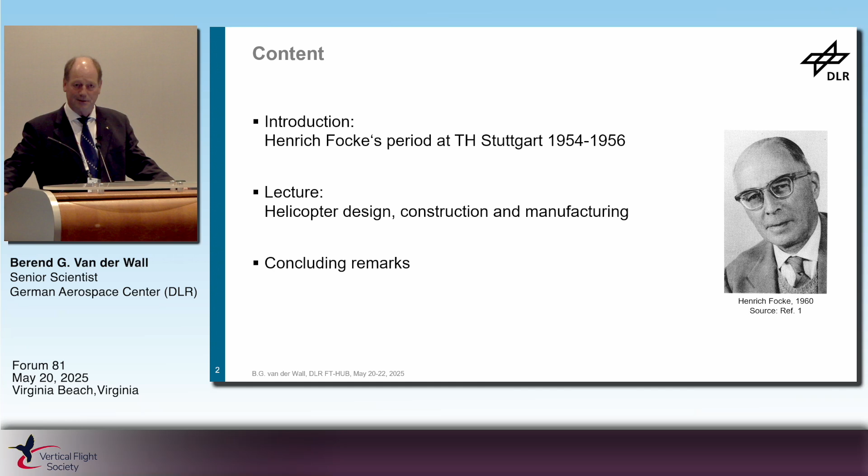On the right, you see Henrich Focke, a little later than the period of his lecture, 5 years later, but it's quite sure he looked about the same at the time. Looks like a grandfather to students, my impression.

In the 50s, in the post-war times, when no aeronautical research and development was allowed in Germany, he had a job first in the Netherlands and then went over to Brazil, who bought all the developments already made in the Netherlands. The subject was to develop the quad-tilt rotor Heliconair, but due to spare part issues, he was also asked to develop a 2-seater small helicopter called Beija-Flor, which means colibri or hummingbird in Brazil.

Until in April '54, he got a call from Germany, from the Technical University in Stuttgart, because just 1 year ago the restrictions had been relieved and the development and manufacturing of aeronautical aircraft would be allowed again in Germany. So every country reestablished their research facilities and universities, increasing the number of aeronautical institutes teaching aerodynamics and design, etc.

So the University of Stuttgart was looking for Henrich Focke to fill the position as professor and director of the new Institute of Aircraft Design, both for fixed wing and helicopters. As good complementary research at the Stuttgart airport, Professor Just, who was the chief aerodynamicist of Focke during the war times, was the head of the German Society of Helicopter Research. He was also lecturing at the university on theory, and Focke as a practitioner brought the industrial background to it. So they thought it beneficial for both the university and the development in Brazil.

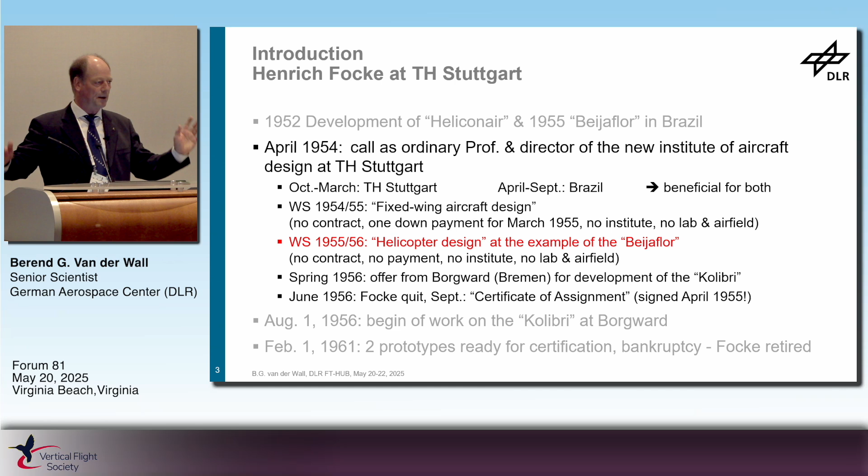Nothing was going forward. At that time, he was approached by Borgward, a car manufacturer in Bremen, who wanted to build not a Volkswagen, but rather a Volks helicopter. He was a single man heading the company and made all decisions on his own, with no one interfering. So Focke happily agreed, joined the Borgward company, and developed a helicopter. But at the time of certification flights, the company went bankrupt, and with it the helicopter development, so he retired.

Just as a short background, now we are turning to Focke's lecture at the Technical University of Stuttgart with all the content outlined here. I will come on to the content step by step.

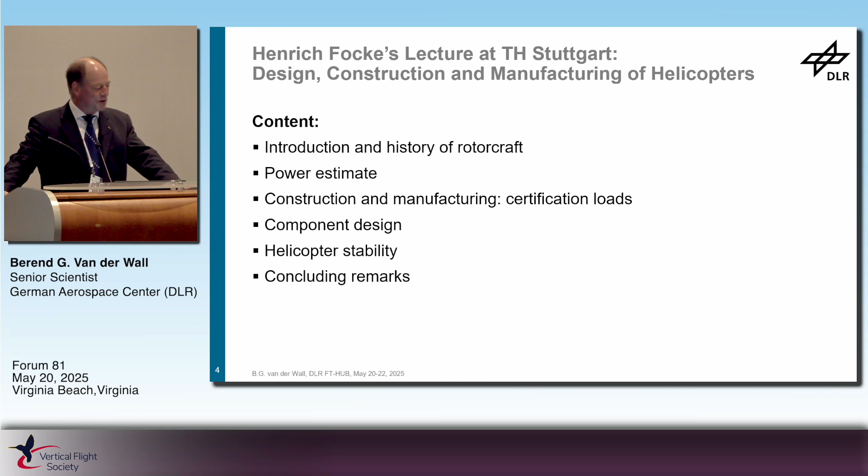Of course, I can only give a brief overview of what he's addressing in much more detail in the manuscript, which is a full prose manuscript of 122 pages, including graphs and sketches. Especially the handwritten sketches I want to bring here as well.

This was to give a student some impression about a helicopter, and hardly anyone had seen a helicopter in Germany at the time, maybe from Americans, but only the S-51 helicopter or so of that type. So most of the students had never seen one and did not really know what it is about.

He said the principle is: if you have two aircraft tied together by a 1 kilometer long rope, and both take off at start, they will turn in circles. You might fix the rope in the middle to the ground, and when the aircraft have some excess lift, they have centrifugal forces because they are turning around in circles, and the excess lift will bring them up higher.

And the result of the rope is the coning of the helicopter blades. So this is kind of equivalent to better understand the principle, the balance between lift and centrifugal forces.

Then he went over to the history of rotorcraft with the pros and cons of the early designs up to '22. He was thinking of these as kind of pioneers with no real success. The period from '22 to '34 had pioneers with at least some little flights, but significant handling quality and control issues.

Until in '35, with the German helicopter developments, there were the first practical helicopters that could stay in the air for a long time. They could reach high speeds, could reach high heights, and they had excellent handling qualities and stability. So these are the first practical helicopters in his mind.

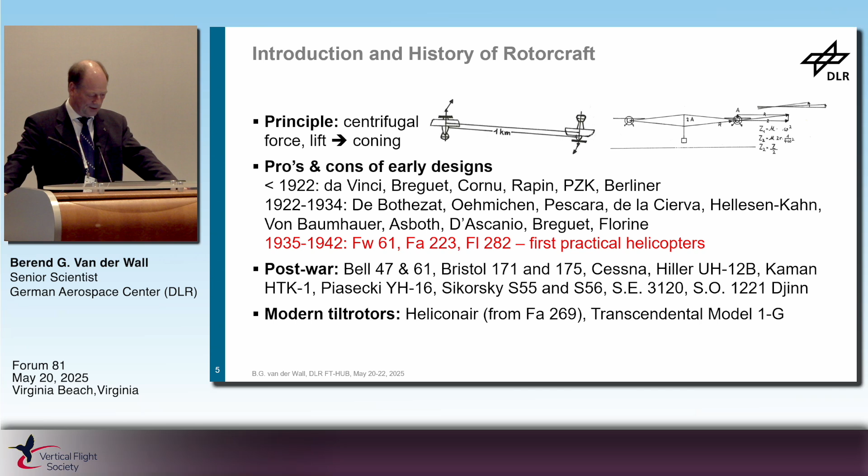The post-war period then brought all the international developments, especially in the United States. He also addressed the modern tilt rotors at the time, which was the Heliconair, a derivative of his own project, the FA-269 from 1943, and the current Transcendental Model 1G from '55.

Next, he stepped onto the helicopter design, starting with the main rotor, as usually everyone does. But we need to keep in mind that in '55 there were no computers at all. They had paper, pencil, and chart methods to design something. There was no statistics available about existing helicopters because only very few helicopters existed at the time.

So nowadays it's a completely different procedure to have a pre-design and detailed design. He mainly built on his own experiences. He always said theory like momentum theory and blade element theory is good and fine, but there are so many simplifications that you better rely on existing measured data, which he had from his former developments.

Any theory must be triple-checked with wind tunnel or flight test measurements before being applied, such that you know where it is valid and where it is not.

Then he turned to momentum theory, a theoretical result showing that even infinite mass could be lifted with rather little power if the radius of the rotor goes to infinity, but of course there are practical limits like material strength and mass increasing proportional to the third power of radius. He also addressed compressibility issues if tip speed gets too large.

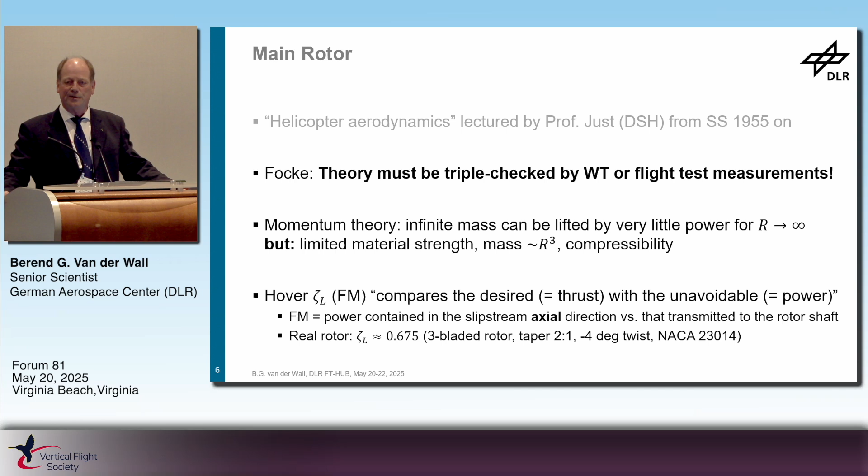His example helicopter throughout the lecture was the Beijaflor from Brazil, a two-seat helicopter shown on the left, with a maximum takeoff weight of 900 kilograms, rotor radius 4.5 meters. Disc loading is also given, and the engine power as a maximum continuous power as well.

The German development after the lecture, a couple of years later, was the Focke Kolibri, and you see there's quite an amount of similarities, but the cockpit is in the front now and the engine in the middle, instead of vice versa for the Beijaflor. And the overall weight is higher, of course, as is the maximum continuous power.

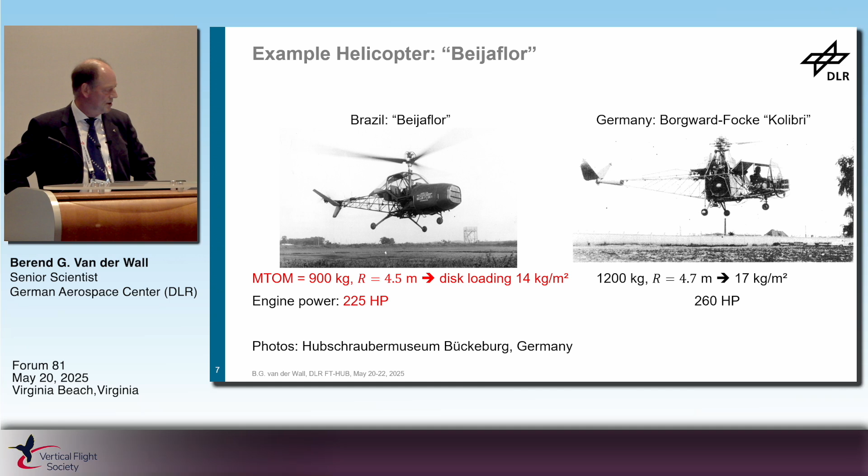So keeping the red numbers a little bit in mind, I repeat them here. He turns then to get an impression of how many horsepower will be needed in hover at sea level.

He ended up with 134 horsepower at the rotor shaft for hovering at sea level. However, that's not all - we have a number of losses: cooling, gearbox losses, hydraulics, avionics, auxiliary devices, and the big part of losses, the tail rotors and their gears.

Also, we have to fulfill performance requirements, which are minimum hovering height of 1500 meters out of ground and vertical climb speed of minimum 1 or 2 meters per second. So he said we need to make an estimate of the maximum power we need across the entire flight envelope.

This must be estimated initially, and we take 225 horsepower of the Beijaflor, because he already had the development in the back of his mind.

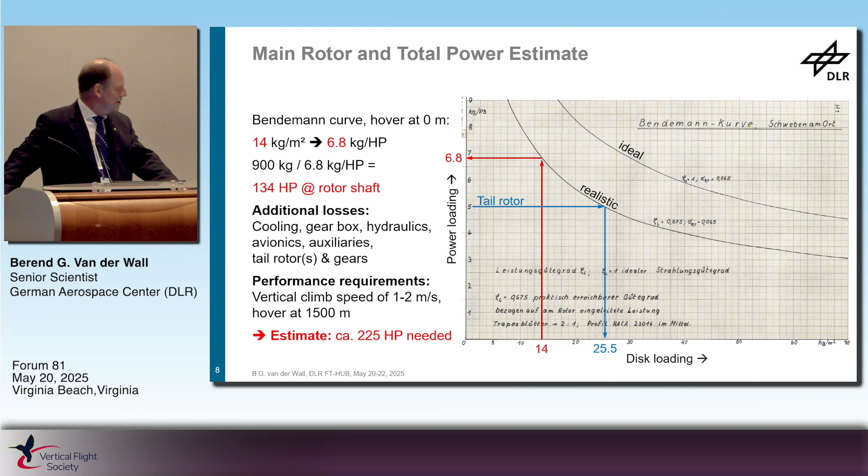He especially stated to his students that we would not be good engineers if we do not account for the extent of the consequences of all our simplifications in theory and the neglect of these. It's a very important sentence that cannot be repeated often enough, even for today's students.

He also said that today's engines usually have a fan for cooling already integrated, and we need not design it ourselves, which is fortunate.

The gearbox losses were addressed next. At the time, they usually had combustion engines with relatively low RPM, but the main rotor, of course, much less - about 1/10 of the engine RPM. Therefore we need most likely a two-stage gearbox, and every stage requires about 2% of the power. In this case, he judged the engine gearbox losses at 10 horsepower.

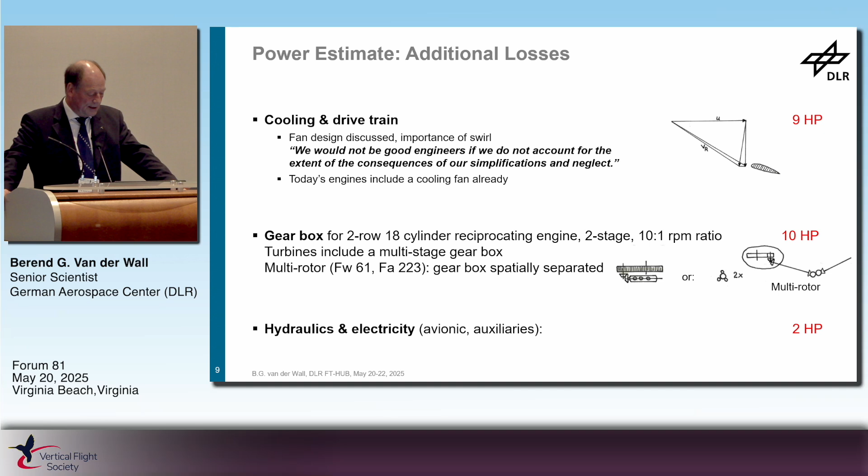Hydraulics and electricity for the avionics and other instrumentation would require about 2 horsepower. Then coming to the tail rotors, first with the conceptual design of them.

Address the single tail rotor like the Sikorsky designs. That's quite nice - they provide the anti-torque, they provide additional side force for yaw control of the helicopter, but they provide damping only in yaw motion because the tip-path plane of the tail rotor is vertical and doesn't provide anything for the pitching motion of the helicopter in terms of damping.

That's why he had already invented and patented in 1938 the twin tail rotor design, as sketched here in the graphs, with both tail rotors tilted by 45 degrees to the side, right and left. They provide both damping in yaw and pitching motion of the helicopter, which removes the need for horizontal or vertical stabilizer surfaces.

They produce not only a side force for torque compensation and yaw control, they also act like a horizontal stabilizer, like the elevator on a fixed-wing aircraft's tail, and it was used by him in exactly that manner.

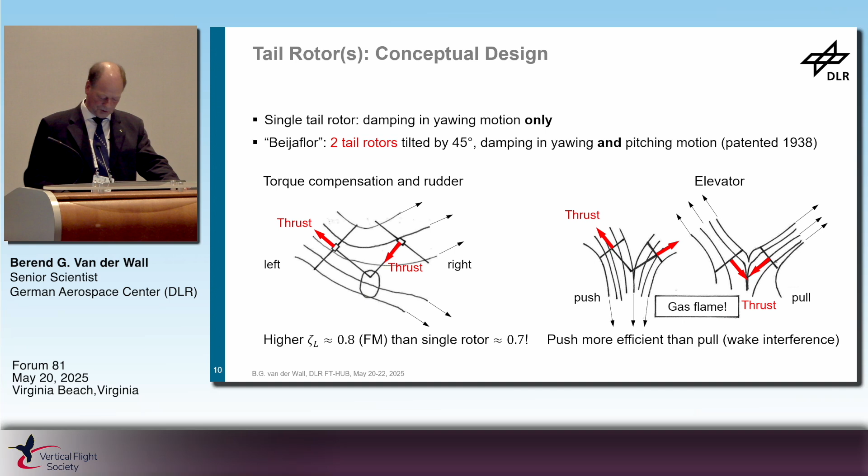Also, at least for the side force, he said the splitting of the jet of one rotor by the second one increases the figure of merit of this rotor configuration, providing more efficiency than a single rotor. So the tail rotors, however, have to produce a certain amount of thrust, and therefore also introduce a big chunk of losses in the total power estimate of the helicopter.

He needs a couple of assumptions first to know what would be the maximum torque of the main rotor. So he made a guess that the maximum power of the main rotor in any ultimate flight condition will be in the range of 175 horsepower, including vertical climb speed and hover at maximum height.

He guessed the radius of the main rotor to be 4.5 meters, similar to or the same as the Beijaflor helicopter.

The tail rotors must be separated from the main rotor by a sufficient amount of distance, in this case 6 meters, to avoid collisions of main and tail rotor blades.

The main rotor rotational speed was guessed at 300 RPM, which with a given radius provides a torque of 415 meter-kilogram. He stayed in old German units instead of Newton meters, using kilogram instead of Newton, so the gravity constant is a measure between them.

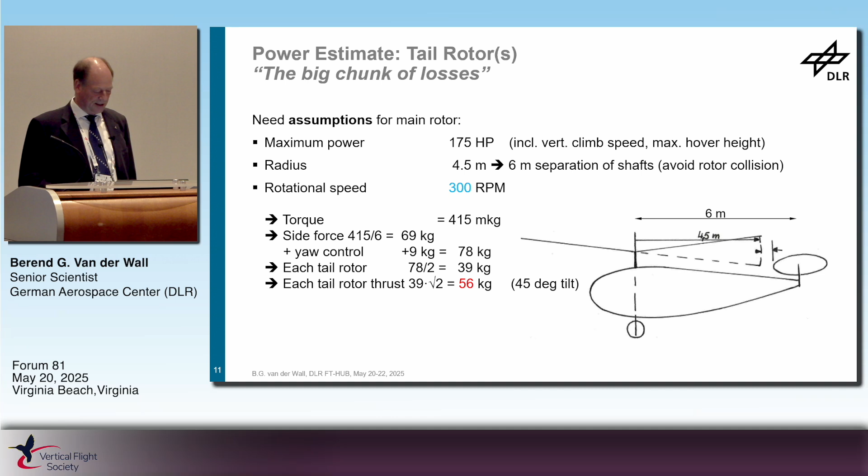For the side force to be achieved by the tail rotor, the torque is divided by the 6 meter separation, giving 69 kilogram in total, plus some margin for yaw control of the helicopter of 9 kilo, totaling 78 kilogram. So each of the two rotors gets half of that, 39 kilogram, but due to the tilt of the rotors by 45 degrees, this number must be multiplied by square root of 2, summing to 56 kilogram total thrust for each of the two tail rotors.

Then you need to estimate the power of the tail rotors required. Again, the Bendemann curve comes into use here, but in reverse direction. He started with an assumed power loading for the tail rotors of 5 kilogram per horsepower, and going to the realistic rotor efficiency curve provides a disk loading for the tail rotors.

Using the disk loading, you can extract the radius of the tail rotor, and then finally the power of the tail rotor in total, including the gearbox. You only need a one-stage gearbox because the tail rotors run much faster than the main rotor, so only 2% of losses, summing to 23 horsepower.

Then he makes a balance of the powers assumed so far. The total engine power of 225 minus the maximum main rotor power in the ultimate conditions, minus all the losses mentioned before, gearboxes and auxiliaries, etc., and the tail rotor, so we end up with a 6 horsepower margin left over.

But in practice, you never end up with the margin you calculate, so he assumes half of it would be in practical use. So there's a lot of practitioner experience getting into the figure.

So at sea level, we end up with an excess power of the main rotor. We assumed in the ultimate condition it would have 175 powers to consume, plus the excess power of 3 horsepower, minus the hovering power at sea level, gives the excess power available at sea level, which is 44 horsepower in this case, divided by the mass of the helicopter. You end up with a climb speed at sea level of 3.6 meters per second, which is much larger than the required 1 or 2 meters per second taught at the beginning.

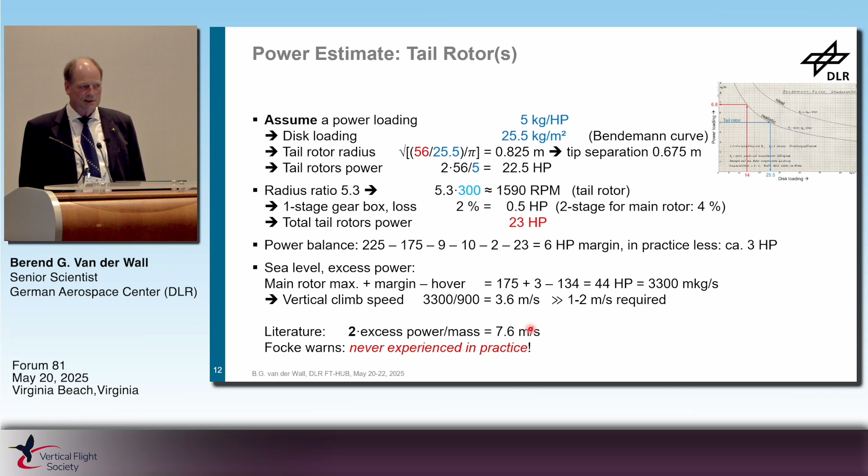He also hinted at the current literature, recent literature in textbooks at the time, 1955 - so the first textbook might be guessed at the time of publication. He said there you often find a number of 2 times the excess power divided by mass for computing the hover climb speed at sea level. And he warned the students, never use that, because I never experienced it.

Actually, we have to be fair. This assumption of 2 times excess power neglects all additional losses. We just have to read the textbook carefully to figure out very quickly what's the case behind it.

So he concludes with some remarks. Still, many parts in the rotor slipstream, like the airframe, are not yet considered in our calculation, and they also increase, for example, the fuselage drag and affect the slipstream of the main rotor. He also addresses that the slipstream contraction usually is completed much earlier than theoreticians might think from isolated rotors or isolated rotor measurements. From his observations, it was just 60% of the radius underneath the rotor where the slipstream contraction is finished.

He also addressed the vertical descent, as he called it, vortex ring state or vertical sagging in autorotation, where the entire rotor drag sums up to be equivalent to a flat plate of a circular disk of the rotor radius with a drag coefficient of 1.2. You find that in practically any textbook, this kind of physical comparison for how the helicopter rotor acts in vertical descent in autorotation.

Addressing climb, all the airframe parts will also be subjected to the climb velocity, but climb velocity is small, so dynamic pressure is therefore small, and the total forces of drag of the airframe additional to what is already there in hover is also small, so it may be neglected, but we need to be aware of it.

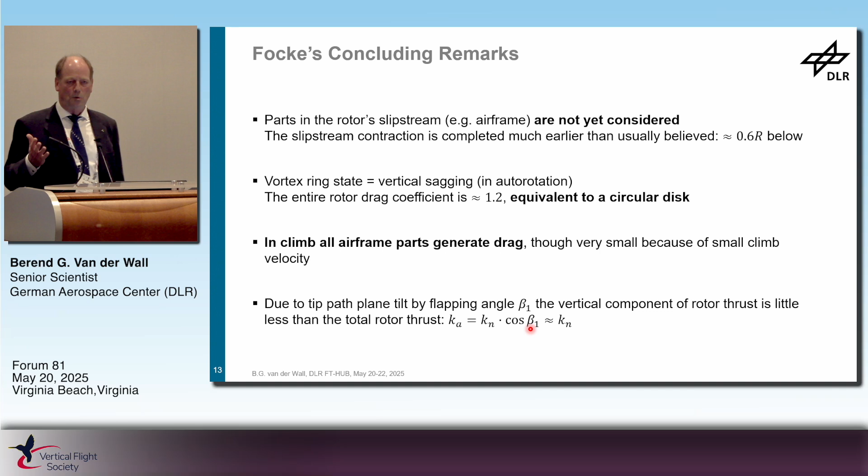But the angle is usually small, so you can neglect it because 99% is no big difference.

Then he addressed the speed performances of the helicopter: balancing lift and weight, and propulsive force needed to overcome the helicopter drag. This is a charted method to estimate the helicopter performance curve, power versus advance ratio.

We have shown here 3 charts that he sketched. The first is lift versus advance ratio for various collective control angles, valid only for one combination of tip path plane tilt, alpha pi, and rotor solidity. This is the first assumption, ending up with a collective control for the required thrust at a given speed.

The next is rotor propulsive force, or negative drag, tilting the rotor forward. Entering this with the collective angle, you get a rotor drag or propulsive force coefficient, which must equal the computed drag of the airframe.

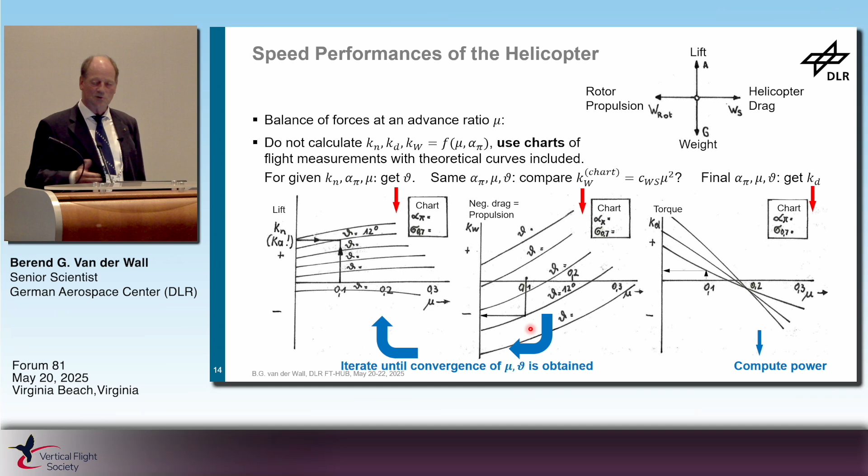If that's not the case, and usually it is not, you have to iterate back and forth, changing the angle of attack or taking a different chart, until you have converged results for both advance ratio and collective control for this required condition. Then you get to the final chart, torque versus advance ratio, giving you the main rotor torque, and compute the power as a consequence.

What you get is one point of the power curve for one height above ground—already an iterative process. You have to repeat that for any advance ratio at this height until you have one curve, then change the height and repeat everything from the beginning until there's no solution anymore.

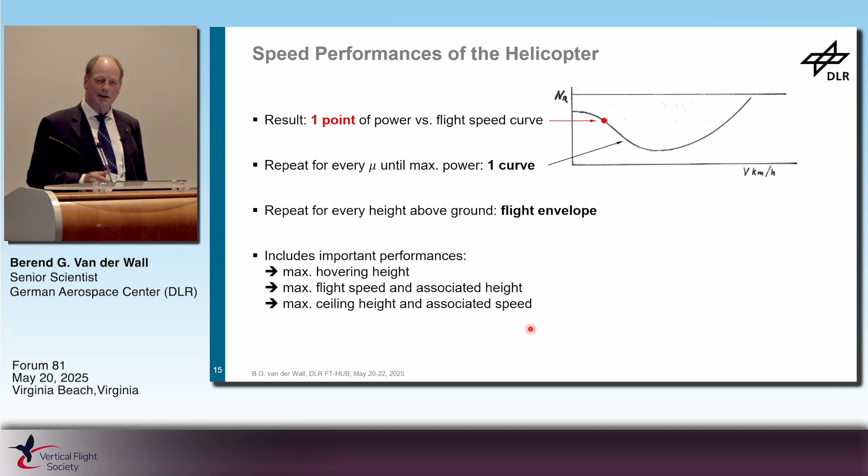The curve you get as an outcome is the flight envelope of steady flight: hovering, maximum hovering height, flight speed and associated height, and ceiling height with its associated speed. That's how it was done at the time, with no computers.

The outcome of all this is an offer to the customer with a short description of the vehicle, its weights, properties, computed performances, and the cost. At the time, estimated at 80,000 Deutsche Marks. In 1955, we had a gross average income of about 4,700 Deutsche Marks, meaning 17 years of collecting money before being able to buy a helicopter.

It's called a Focke helicopter—but not really affordable at the time.

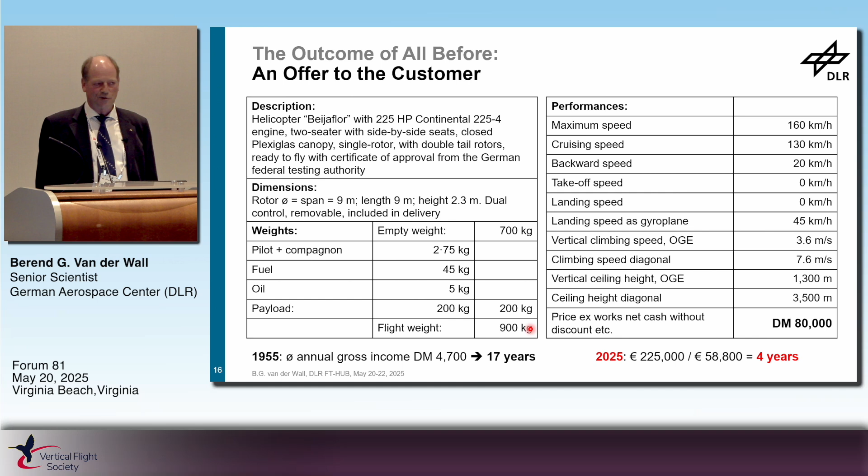Converting this number with the inflation rate to today, it would cost about 225,000 euros, roughly equivalent in dollars. The German average income currently is 58,800 euros, so we end up with 4 years of saving money. So a Focke helicopter is more affordable today than it was then.

We went over to construction and manufacturing, which for all parts of the airframe and helicopter require load assumptions. Load assumptions are usually set by requirements from authorities, but in Germany at the time, no authority existed yet—it was just being built up, and there were no regulations.

He also mentioned that in Brazil there were no regulations either. There, they had to cook their own soup from all the regulations available internationally, mainly from the United States, combined with their own experience and regulations from the World War era in Germany—to the best of their knowledge. That's how they designed the helicopters.

This addressed the frequency content of loads and the load factors applied to components. You have to calculate throughout the entire airframe, or any strut, to a level of detail I cannot represent here. You also have to account for negative load factors, because his helicopters had a switch from helicopter mode to autorotation.

The pilot pressed the switch and it went into autorotation, meaning a jump in collective. Jumping down in collective by 10 degrees makes a big negative load factor.

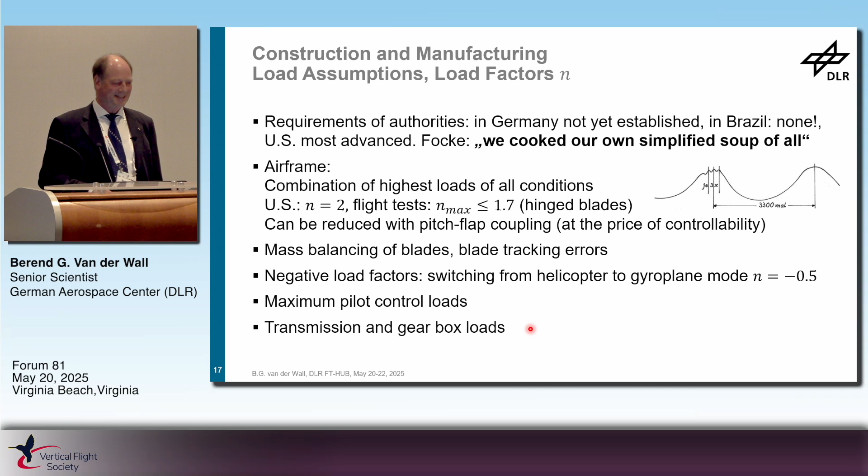So he concludes with some comments on responsibility. The designer first—it must be said over and over that no regulation from authorities can relieve the designer from their own responsibility for safety.

For conventional designs where you have experience, you can compute as before. But for new or unusual designs, you have to double-think and recheck all the assumptions made before, to see whether they are still valid or not.

So your own thinking must be doubled. Regarding authorities, at the time it was already revealing that many countries had exonerated the inspection authorities, leaving the sole responsibility to the designer—even if an accident was caused through an official order that was technically incorrect. So the designer is still responsible.

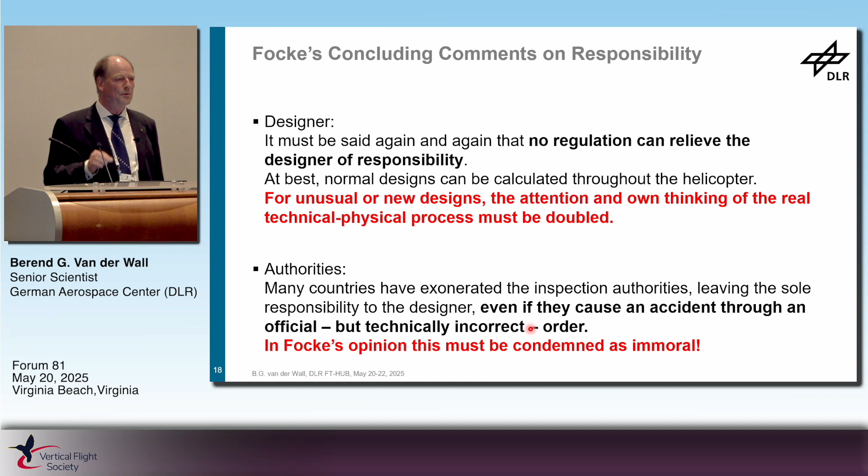He made everything to order. In Focke's opinion, this must be condemned as immoral—and this is his citation, word by word.

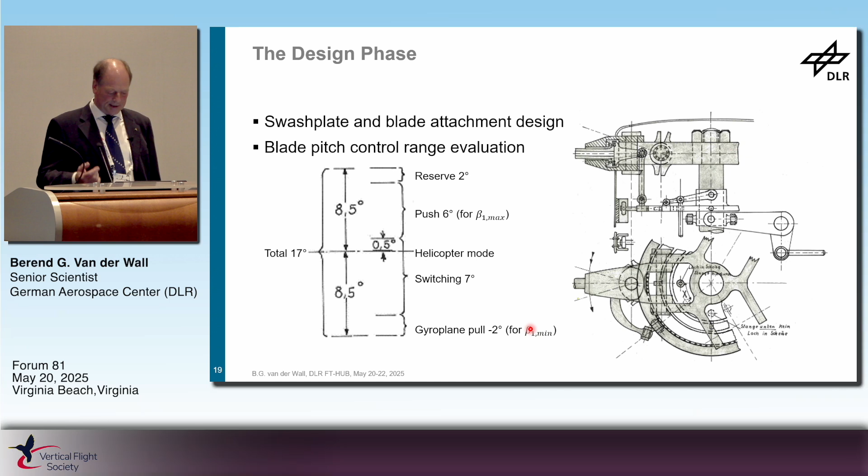Then he went to the design phase of the hub and swashplate and articulation of the blades, ranges of controls required for the pilot. He also addressed steady flap lag divergence that you hardly find in literature today, because he encountered this with the FA 223 development.

At the first accelerated spin up of the rotor, slow motion acceleration posed no problem. But with fast accelerated start up of the rotor, the blades went back first because of their inertia, then lift was developing, blades flapped up, and with a large lag angle, they have a larger increase of angle of attack than the centrifugal force pulls back, and all the blades went up and stayed there until very low RPM, when they're moving down again.

The sketch already shows that, and you can see it easily with your own hands, having a flap hinge and a lag after that. If you flap up and then lag back, you see immediately the angle of attack developing. It's essentially a cardan hinge by 90 degrees, and that's a natural behavior.

To address this, he suggested three measures. One is to have heavier blades - larger centrifugal forces eliminate the problem because the blades straighten out again. However, the larger centrifugal force causes more strain and stress to the blades and the structure, which is undesirable, and they also become heavier, giving less useful load on the helicopter.

You can increase the hinge offset to the hub, increasing natural frequencies of flap and lead lag, especially lead lag. But as lead lag frequency goes up, the danger of ground resonance increases because you're approaching 1 per rev. Not a good idea.

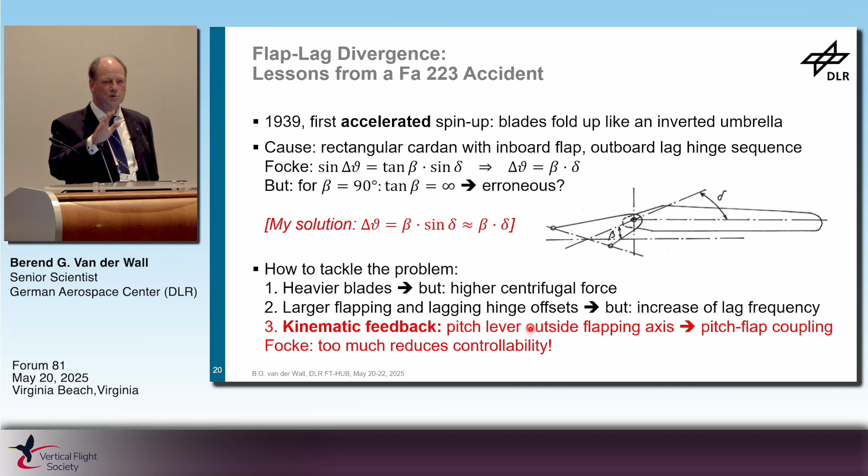So the kinematic feedback, like a delta 3 as we call it, putting the pitch link outside of the flapping hinge, automatically reduces the pitch angle by flapping. That's the measure he introduced to keep it safe and stable, but don't overdo it - you can overstabilize the rotor and make it uncontrollable if you do too much.

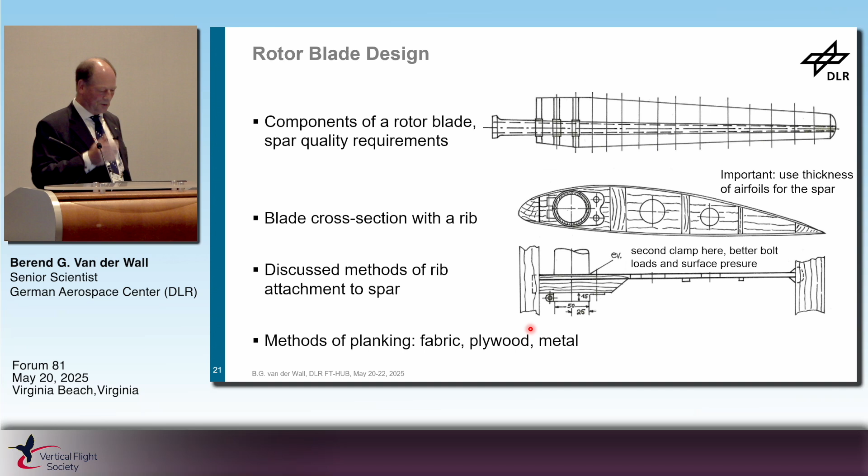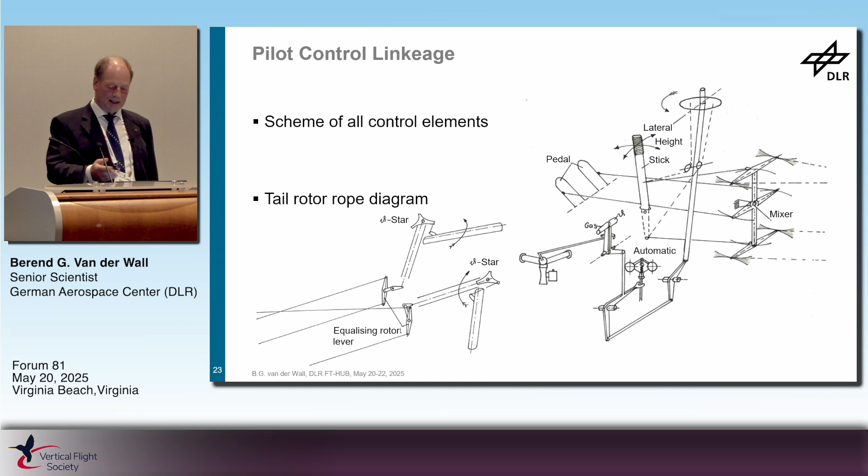At the time, we always need to recall there were no computers. They had tables of functions, mathematical handbooks, slide rules to compute something, mechanical computers to just have simple calculations done in a mechanical way, and paper and pencil. There were no statistics from former helicopters, or extremely scarce, so you could not make a statistical inter- or extrapolation from existing models. You had to do it by hand or rely on your own experience.

For best results, you have measurements from your own former helicopters with charts, and use all these charts and combine theoretical curves with the curves measured in the charts. Then you immediately know here is quite good agreement between theory and measurement, and in the other regime, there's a large deviation. We know there are missing elements in the theory, because he relied much more on the experience of the measured data he had performed with his own helicopters, either in flight or in wind tunnel.